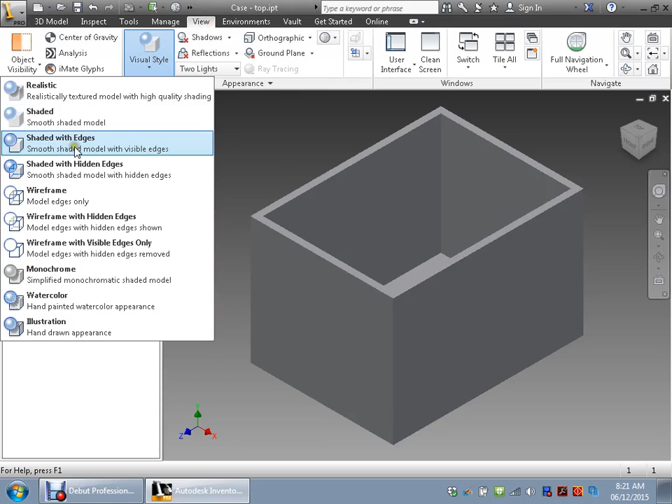So this is part 2 of a tutorial on making a case for electronics. Right here I have my basic box that I did in part 1, the introduction, and I've lost my edges, so I'm going to go up to view, visual style, and go shaded with edges. Now I have my edges on there and I can see it a bit better. So on to making this more of a case that's usable.

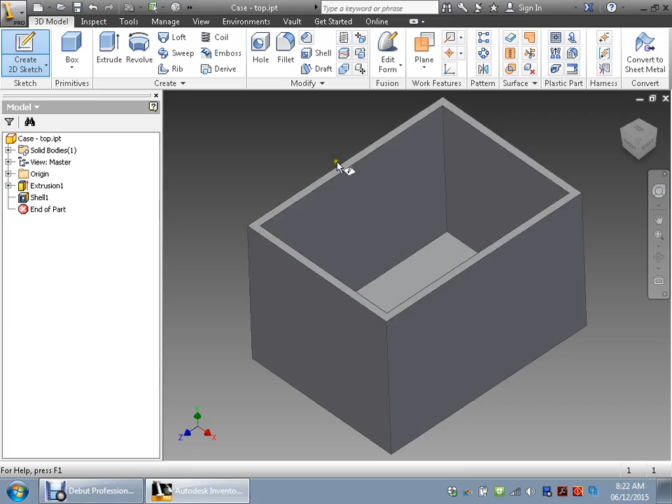I'm going to go to 3D model, then 2D sketch, and select. Now here's the important thing, you got to decide what plane you're going to work on. In this case I'm going to work on this top edge because I want to have some screw holes put in so I can actually screw the case together later on.

I'm going to click on this and you can see it goes into sketch mode and the ribbon changes. I'm going to come in a bit closer and move this down, and I'm going to put 4 holes in the corners to put screws into so we can screw this case together.

I'm going to click on circle, and it doesn't matter where I start, I'll just make a circle here somewhere. Click on it, then immediately dimension it, dimensioning it out to here, and I know I want this to be 0.25.

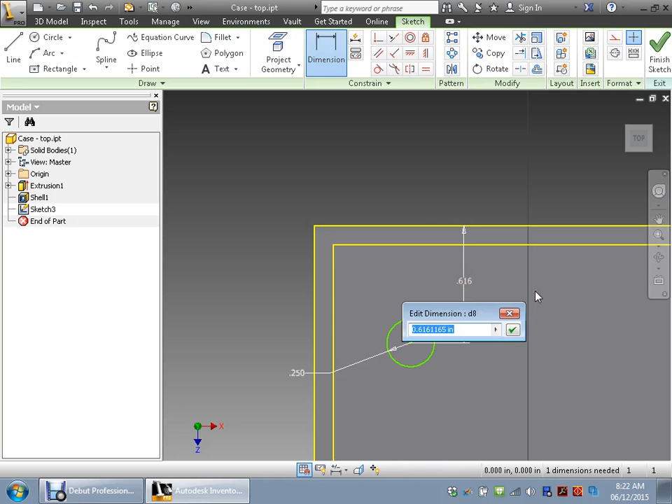Then I'm going to dimension it and say I want it up in the corner here. I'll click on the center of the circle, click on the line here, and drag - you can see the dimension comes out, and I'm going to put this as 0.2. Then I click again on the center, and click on this line this time, and you can see I got a dimension, that's going to be 0.2.

If I look, I still got a little bit left over here, so I'm just going to change this dimension to 0.3. Now it covers everything. That's the first part - that's going to be the outer part of the circle, or the standoff that I'm going to create.

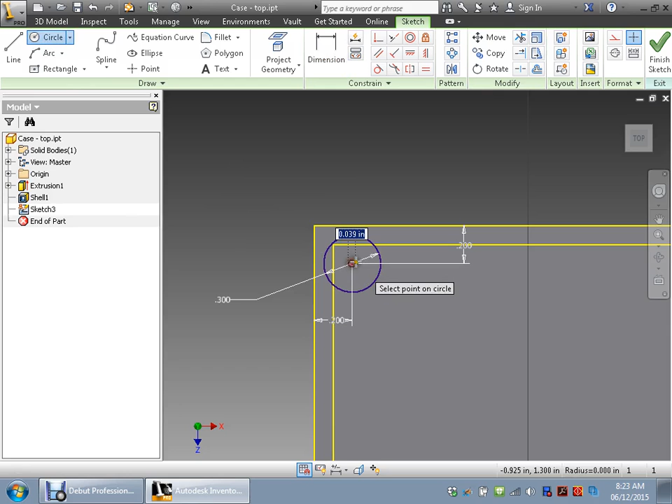Then I'm going to create another circle here, going in the center. This is going to be for the actual screw hole, and I'm going to dimension this to be 0.11 - that's the number that's been working for us. So there's my first part done.

There's my first one. Now I could sit there and go all the way around this and redo that 3 or 4 more times, but it's kind of a waste of time, right? So let's just do a quicker method.

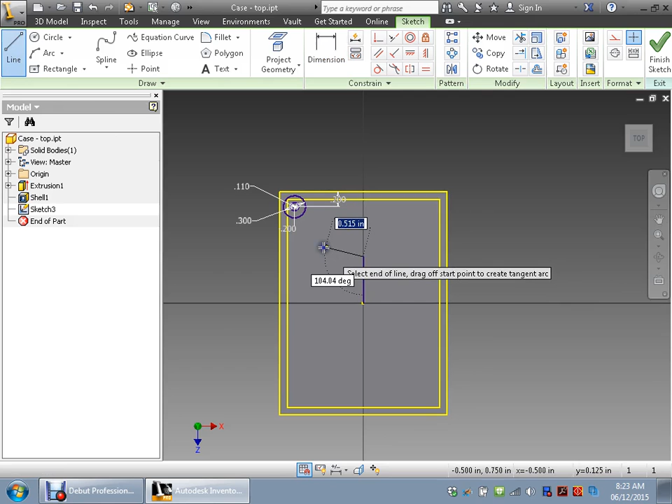First off, I'm going to create a line and put this line dead center here this way, right mouse click and click OK. Then I'm going to go line again, click here, right mouse click and click OK. Now I've got 2 lines here, one line there, one line there, and I'm going to use these lines to mirror this around.

So I'm going to zoom in now. I'm going to select the pattern tool called mirror, click on select to make sure I'm on the right one, and select the outside and inside circles. Then I'm going to select the mirror line, click on this line, and hit apply - you can see it automatically goes across. Then I hit done.

I'm going to mirror it again, clicking once more because I'm into a different one now. Now what I can do is actually select like this, highlighting around. I can select that way - whoops, I didn't mean to get out of that.

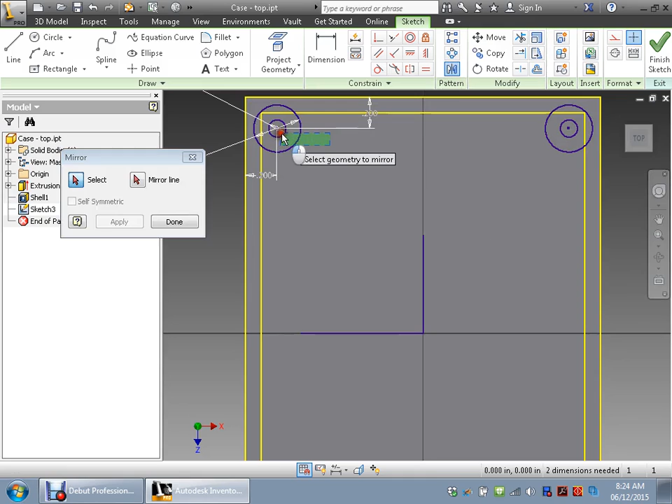Or I can go the other direction and only touch what I want to be highlighted, like that. I can go like this, and you can see it highlights as well. Then I select my mirror line, which is down here, and click apply - and if I scroll out here, look, there it is down there. So there's my 4 holes, and I'm going to click done and finish sketch.

And now I have - don't worry about the lines, they don't matter.

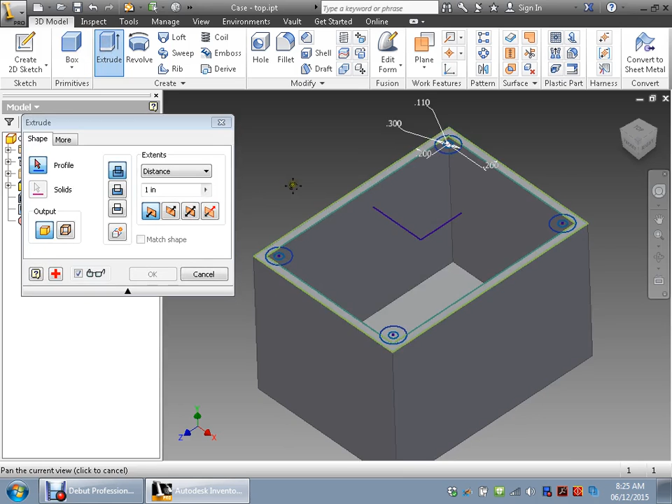Okay, and now I have these 4 around that are now going to be extruded down into the box to make my standoffs for screws to go into. So we click on extrude. Now this is where it gets a little challenging. I'm going to zoom in here so you can see what's happening.

So when you click on extrude this time around, you can see I can extrude this part here, I can extrude this part here, I can extrude that there, or I can extrude the whole inside around stuff. So you've got to really think about what you're extruding.

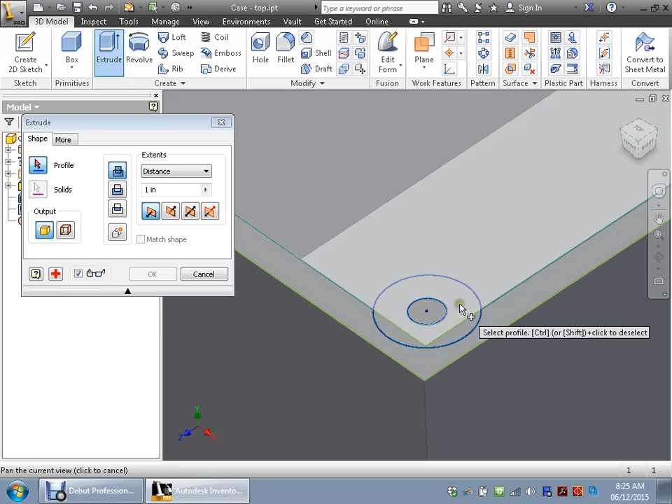In this case, I want this donut, so I can click there. I can click right here - you can see it highlights the donut. I'm going to click on it.

You can see it extrudes one way. Go to this one, do that one. Come zoom into here. Do that one, and then I'm just going to pan over to this and that one. Now I'm going to zoom out, and you can see that they've been extruded now up, and I want them the opposite direction, so I can click the opposite direction.

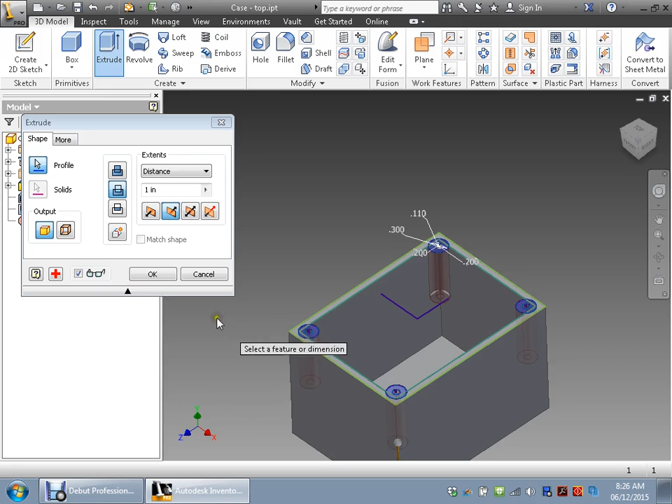You can see they go down, and I would have to guess how deep I'm going to go. Well, there's got to be an easier way, right? And there is. So let's go back up to here, and for this distance, you just click on 'to next'. Since there is nothing going up next, it's going to change directions and go to the next surface.

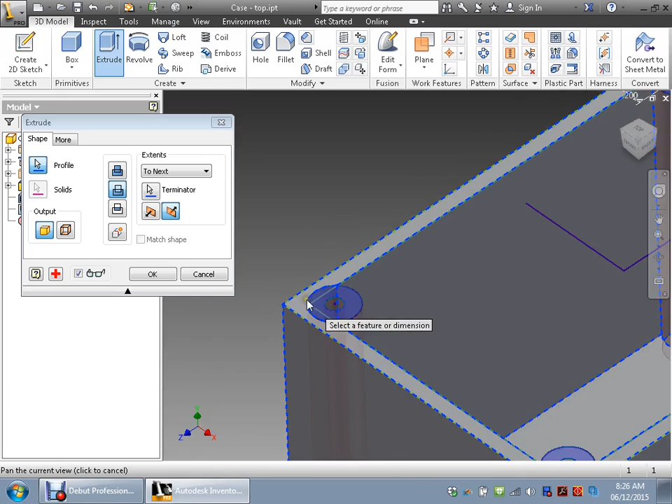So click on it, you can see it goes down. Now here's the next thing - you can actually see if I zoom in close here, it kind of looks like it's removing material.

So here we have different options for what you're going to do with the extrude. This is join, this one's called cut - I don't want to cut the material out, I actually want to join it. This one's intersect, and you can see if I click intersect, it does something different than cut or join. I want join, and we just click OK.

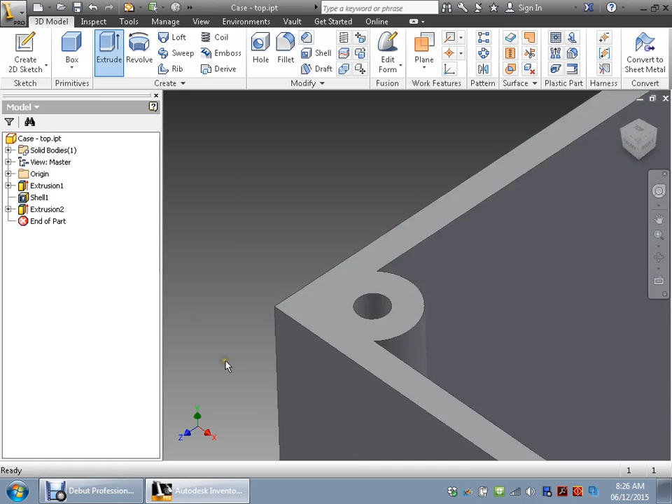And now I have my box with my little standoffs in 4 corners, right? So we're getting there, this is getting pretty good. And what else do we need now? We probably need maybe some holes for some parts to go through, like a switch or some LEDs, and we probably need the edges rounded.

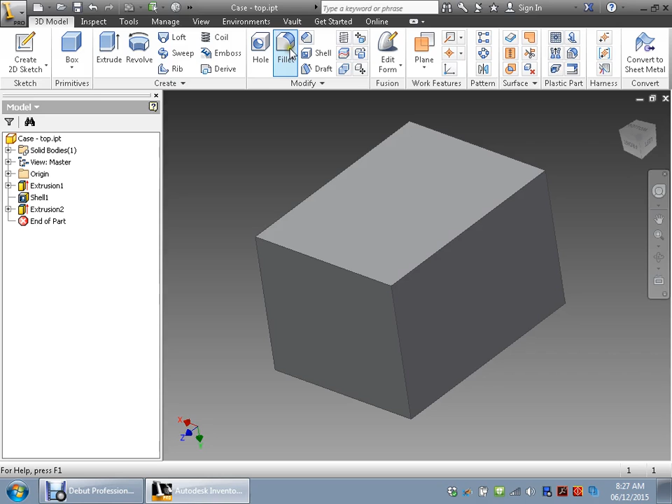So let's just do the edges really quickly because that's simple. I'm just going to rotate this around, okay, and see the bottom of it. And I'm just going to come up to fillet - this is a simple one. Click fillet, and all you do is go around and click on the different edges.

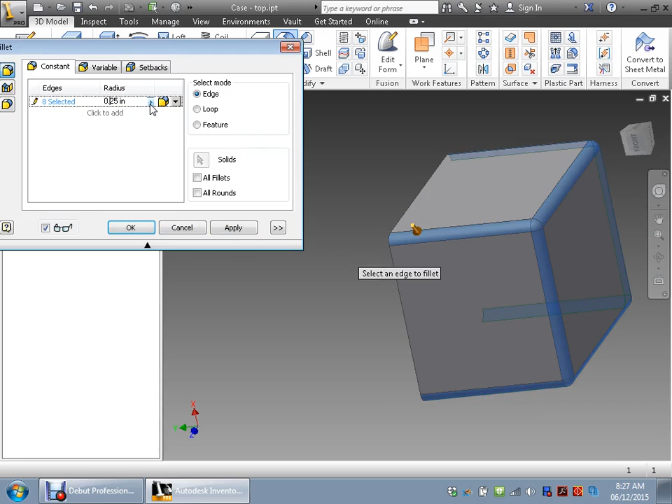Make sure you get the right edges that you want. I'm just going to come around, keep going around, and there, and one more, there - let's change the radius right here. We can change it to 0.25 and hit apply. You can see it, and let's just close this down, and now I have all my edges done.

Again, at any point in time, I can simply come into this and come to the fillet, double click it, and say, no really I wanted that 0.2. You can change it and just click OK. So there's my fillets.

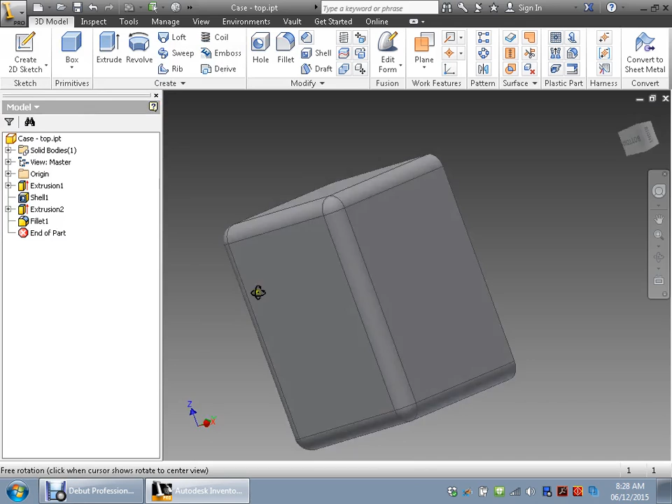So the last thing I want to do is add maybe a hole for an LED. You click on a surface - oh, maybe I want my LED on the top, I don't know. So click on a surface, we're going to go create 2D sketch, and we're going to go with a circle, and we're going to put an LED hole right there.

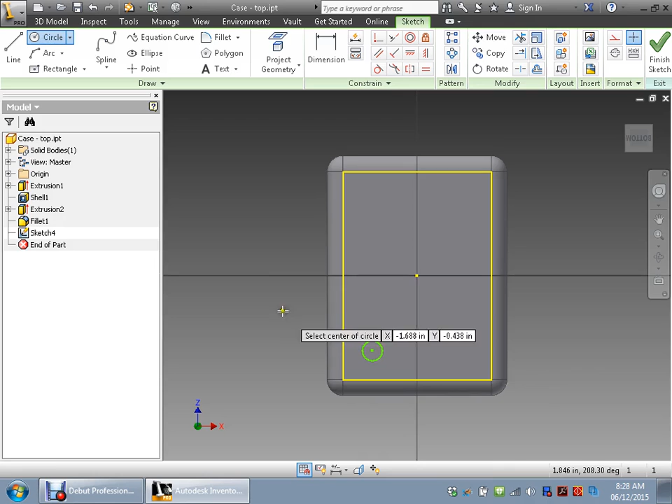Now, that was in inches, so dimension it, and let's just come in closer here, and we're going to click - I'm going to put it out here. Now here's the thing: this is in inches, and LEDs are millimeters. LEDs are 5 millimeters, so instead of putting in inches and trying to convert, I can just simply put in 5mm, because that's a 5 millimeter LED, and I can hit enter, and you can see it automatically changes it to inches.

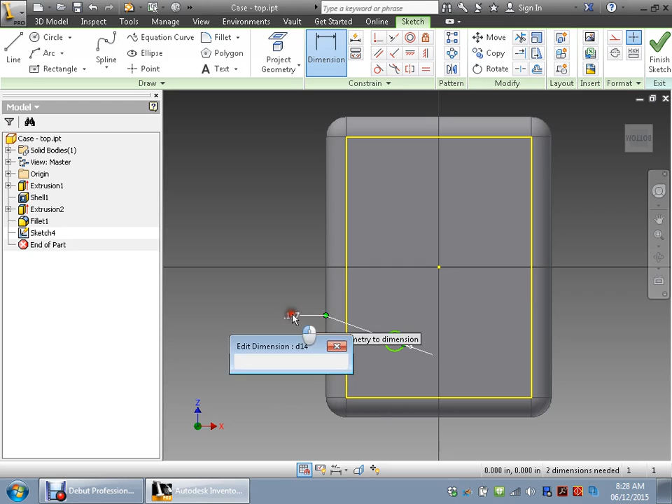Now here's the scarier one - when you 3D print that 5 millimeters, it's a little bit smaller, so I'm going to go 5.1. Okay, and then I'm going to hit OK, and you can see it changes the inches, but that's how you change from inches to millimeters in this program.

And then the last part is I'm going to dimension it from the center. Let's go out to the edge, and I want it to be, I'll make it simple, 0.5, and then from this one to this edge, I want it to be 0.5. Okay, yeah, that's good enough.

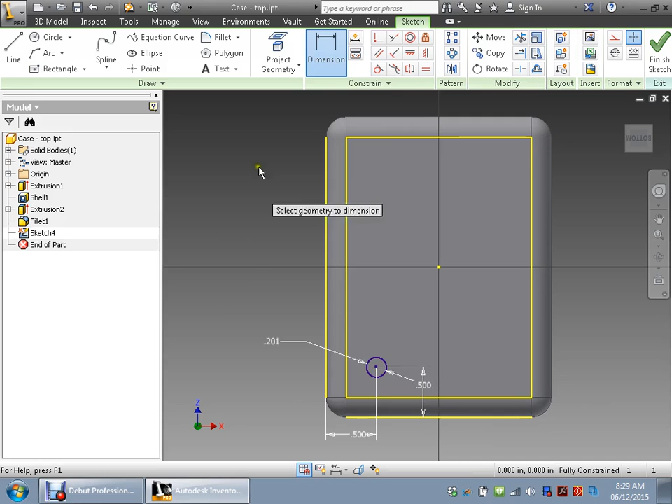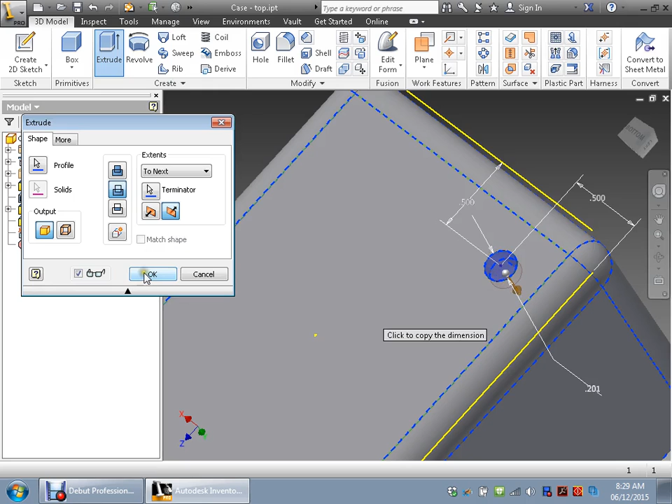You hit finish sketch, and now I just extrude it. That's easy. This time around, I'm not joining. I got to figure out what I'm going to extrude first, so I'm going to click on that edge. I'm not joining this time, I'm going to cut this time. You can see it goes the opposite direction. I'm just going to put to next because it's only going just through that. If you go farther down later on, it might actually cut into some other piece, right? And we click OK, and then there's my hole for my LED.

Now I'm sure from there you can figure out, geez, making a switch hole or something else. It's just a matter of figuring out sizes. So that kind of completes this tutorial.

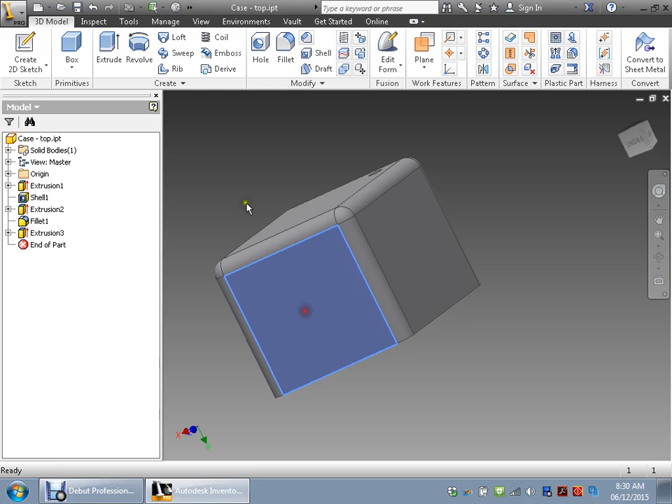I have a case now, I have a hole for an LED, right? And you know, what the heck, to make it proper, let's just go and say we'll put a rectangle in here for a switch of some sort. So we'll just do a rectangle really quick.

I know it's going to end up right here. Doesn't really matter where it ends up because I'm going to move it anyways. And I'm going to say that the dimension of this thing is going to be, yeah, 1/4 inch is good. Okay, down here, I don't know, maybe it's supposed to be 0.5. And then I'm going to say I really want it from this edge to, no, I want it to this edge here. I want it to be 0.25.

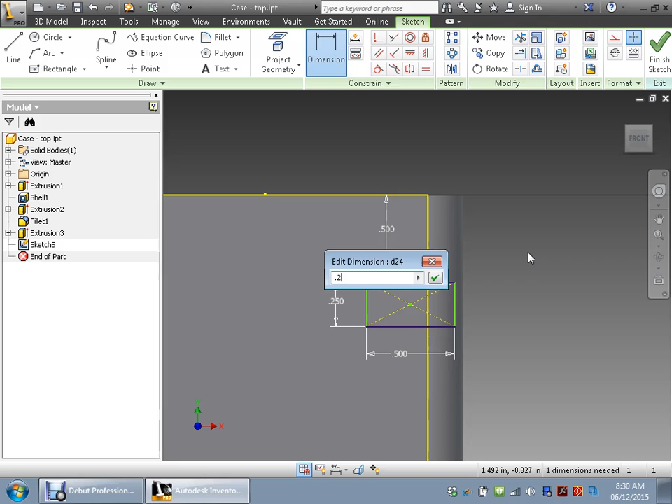And then from this edge to this edge, I want it to be, let's see if I can do this right there. Oops, hang on a second. This is going to be an interesting one. Let's get in here closer. I want from this edge to this edge. There we go. We're going to put that in there, and we're going to say that's supposed to be 0.25 as well. Okay, there we go. All right, we'll hit finish.

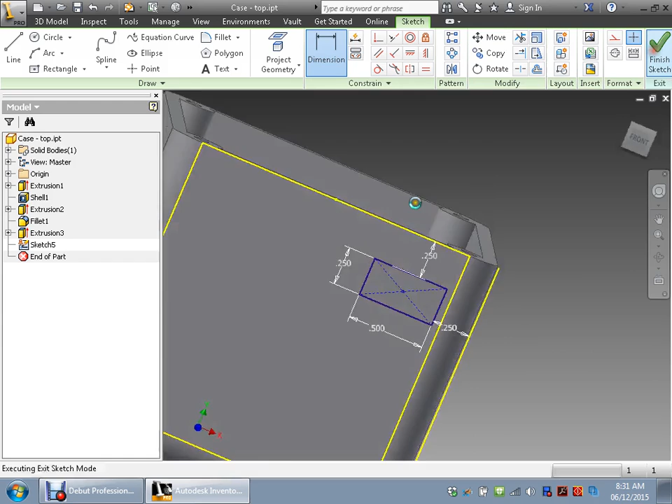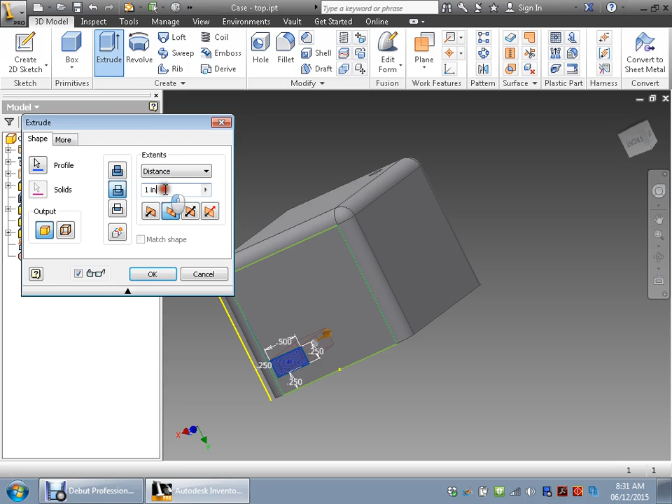And once again, you just go extrude, grab that bit, right? Cut, distance to next. Nope, don't want to go through. See how it's taking it all the way through. So what we're going to do is we're just going to have to go to, hang on, no, let's just go distance. And I know the distance in this case is 0.1 thick. Okay, and there we go. There would be my hole for my thing.

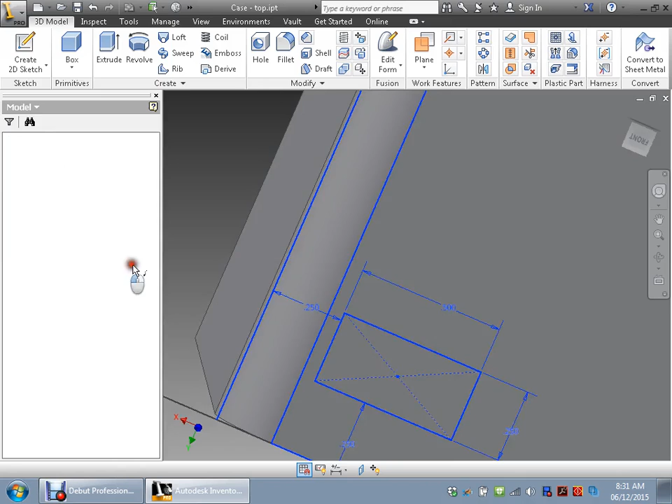Other than, I'm cutting into that. This is kind of a cool, interesting point right now. You could look at this and say, oh, hang on, I'm actually cutting into that, right? That's not good. So I'm going to go back to this extrusion, to the sketch, double click it and say, no, I think that needs to be over a bit more at 0.35, just past, and hit finish. Okay, and then you go and say, oh, that's better. And if I go from the front view, now I can see that it's not there.

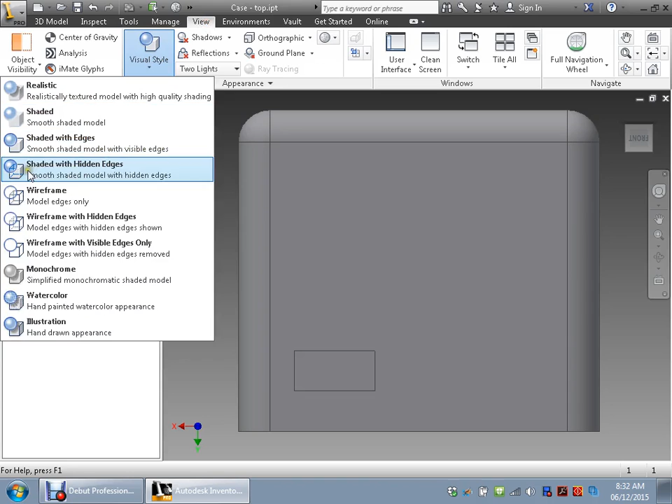Now the last thing is this. I know there's something here, right? But I can't see it. I know it's there. So if I go up to View, and I go to Visual Style, and I go shaded with, no, let's go wireframe. Okay, you can actually see the stuff that's in behind, right? So I can see that nothing, this is touching there.

So if I go, what is shaded with edges? No, shaded with hidden edges. There you go. You can kind of, I don't know if you guys can see that very well on the screen, but basically there's my spot here. You can see a couple lines in behind there. So I know that I'm not touching anything, or it's not going to hit anything in behind there.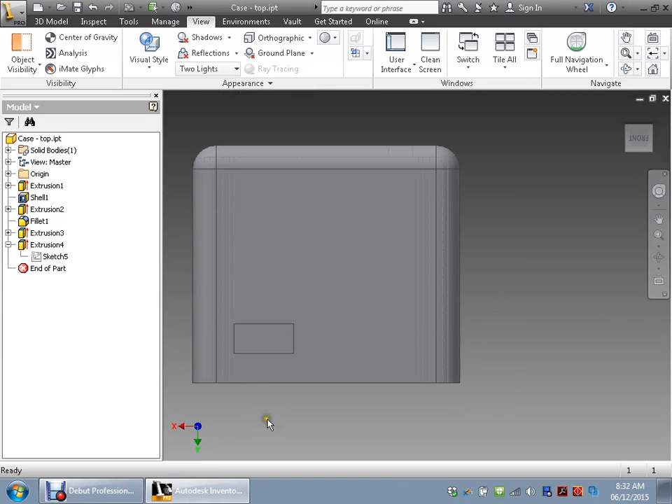Okay, so there's just a couple other little tricks to doing this. How about wireframe with hidden edges? There we go. How about that one? Is that one any better? You can do this and you can see the edges in behind right there, right? So this would be the actual hole right here for the screw hole coming through and stuff like that.

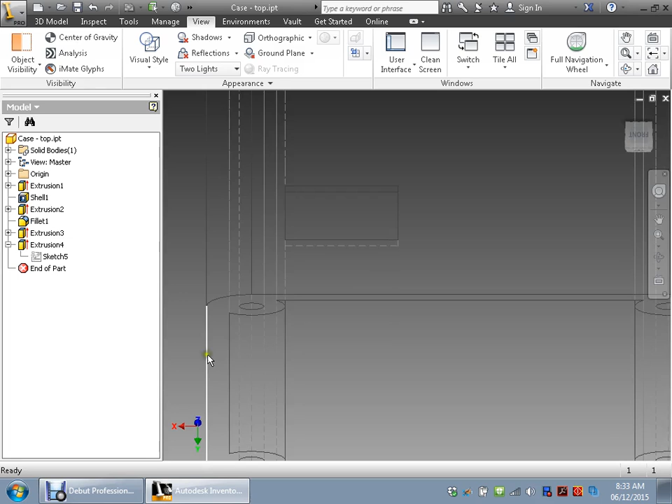If I hold the shift key down, you can actually see it kind of like that as well, as there's the hole right there to there. So anyways, you kind of get the point. I'm going to stop this, otherwise I'm just babbling, and that completes tutorial number 2.